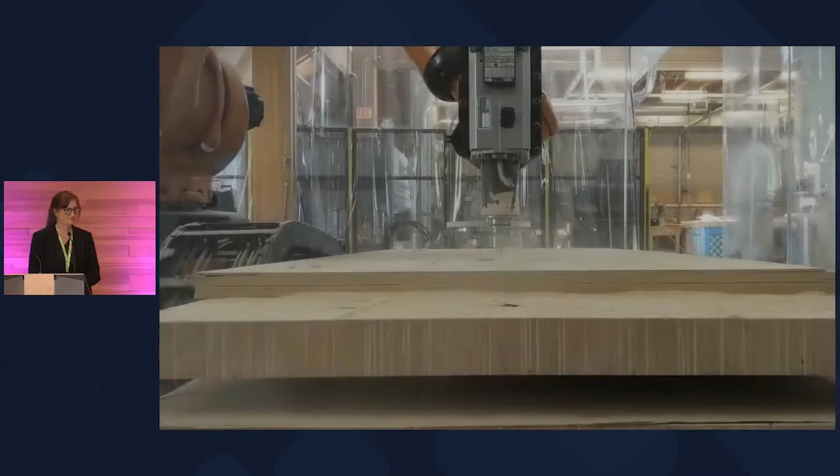And I'm going to show you a little bit of a video that some of you might find parts of familiar, if you look at where the things are sourced or who's talking, just to give you an overview of why it's important.

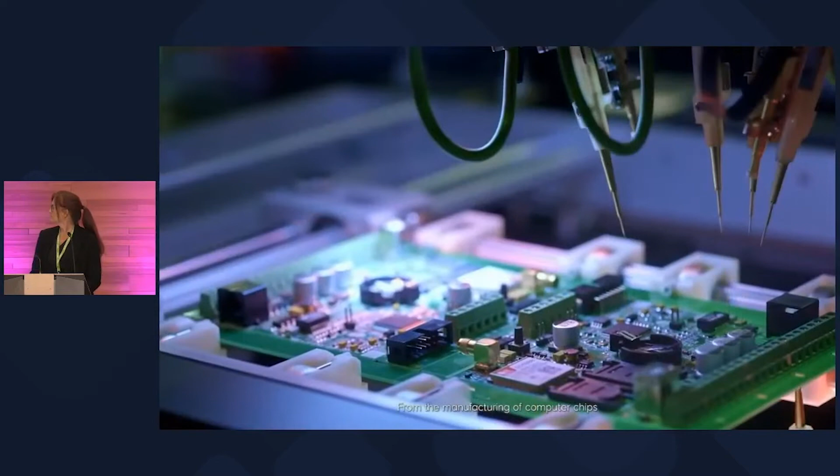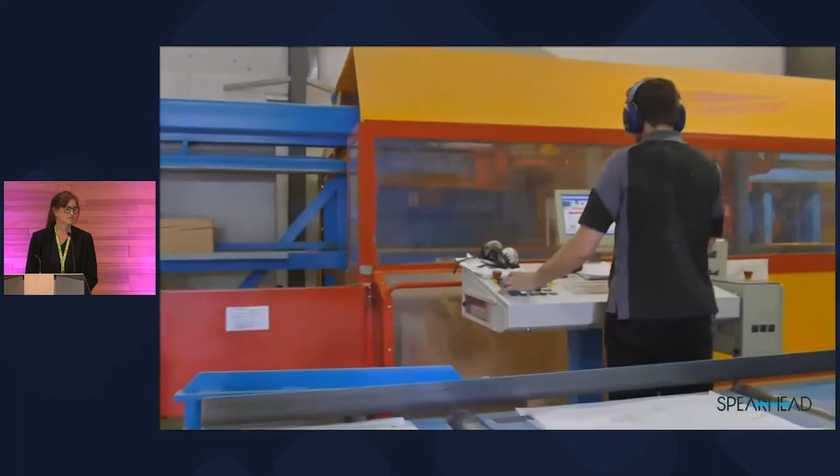From the manufacturing of computer chips to the way we make cars, robots aren't the whole story. How data is created, collected, and interpreted has fundamentally changed the way we live. And now, those same changes are happening in construction.

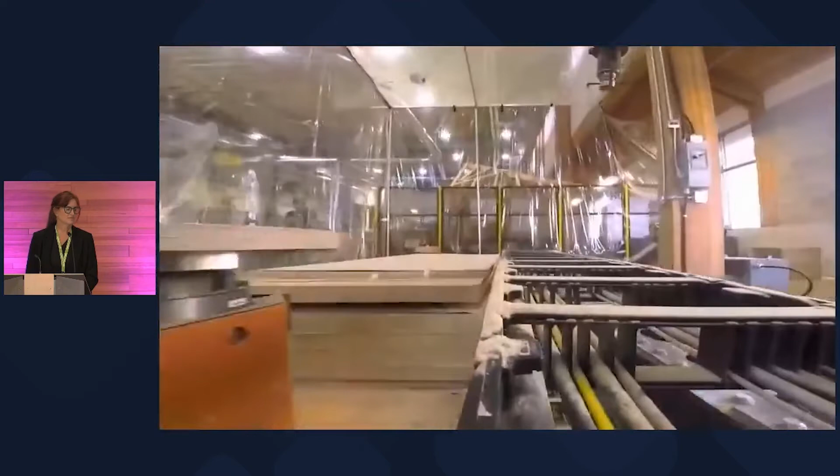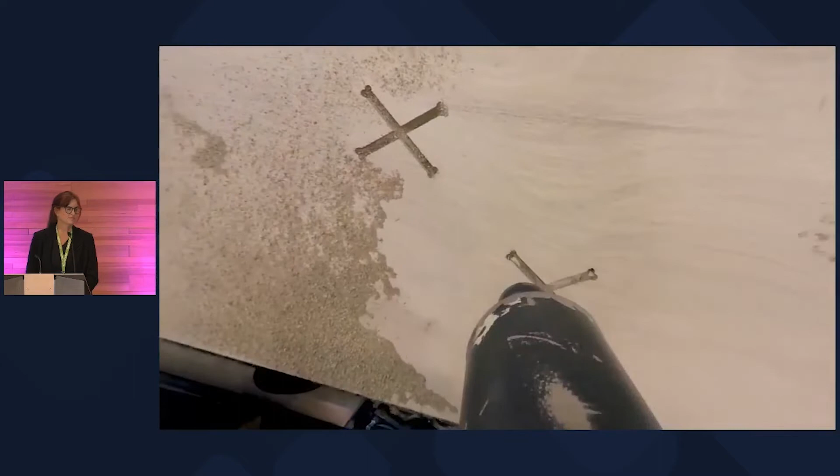As we want to build more precise buildings that function better, that work better, that meet energy codes, we've got to build at a precision level that's hard to do with a Skilsaw and a nail gun on a site when it's raining.

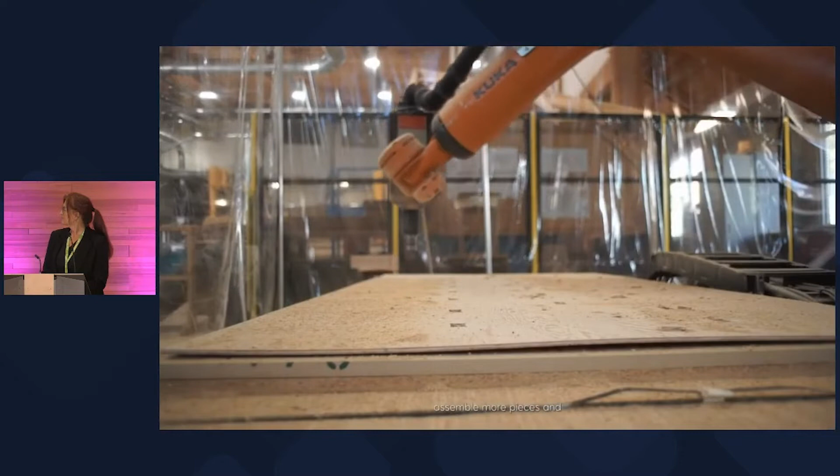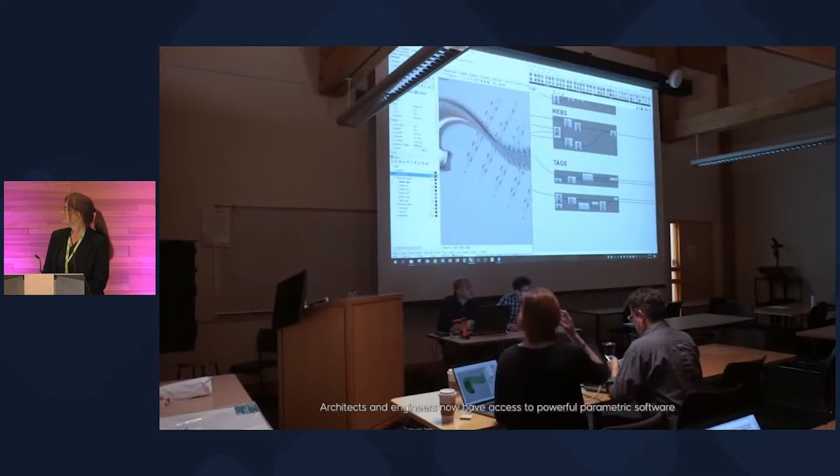Using robotics, it allows us to assemble more pieces and more complex pieces that in totality result in higher performing building components. Architects and engineers now have access to powerful parametric software that can create and analyze complex geometries.

When parametrics give you great control of the geometry, the next challenge is moving it into construction, because you need the accuracy in construction to be the same as the accuracy in the geometry that you have when you design.

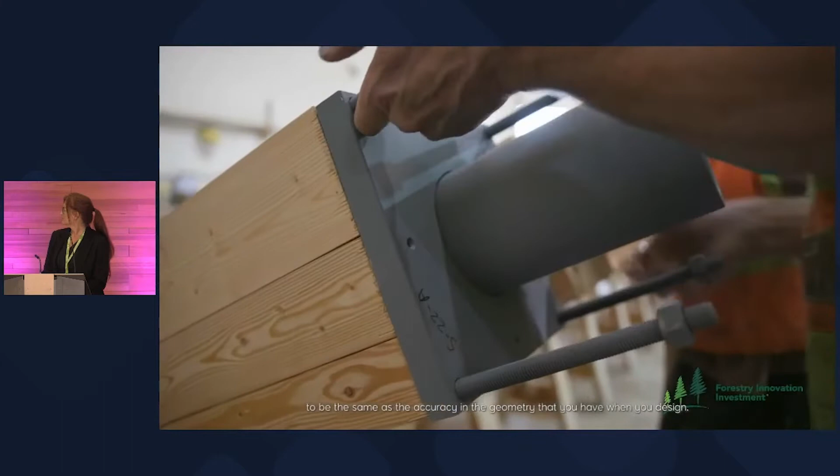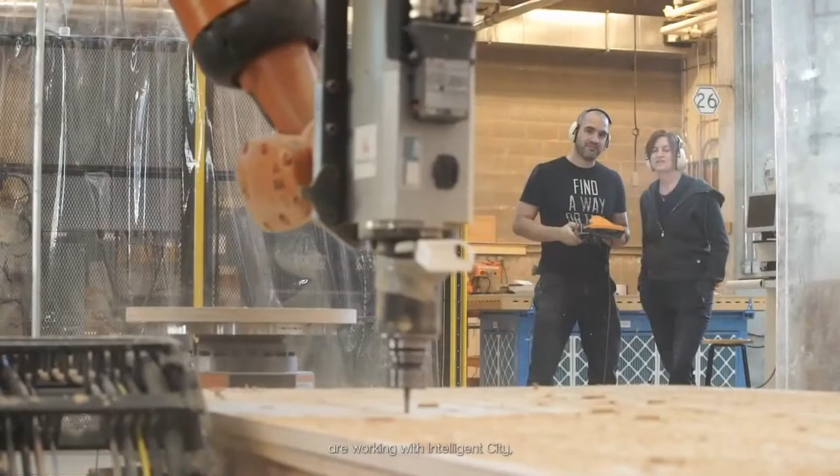At the Center for Advanced Wood Processing in Vancouver, researchers from the University of British Columbia and the University of Waterloo are working with Intelligent City, a local leader in mass timber construction, to make robotic fabrication more accessible.

There's a difference between what can be designed on paper or in software and what can actually be manufactured.

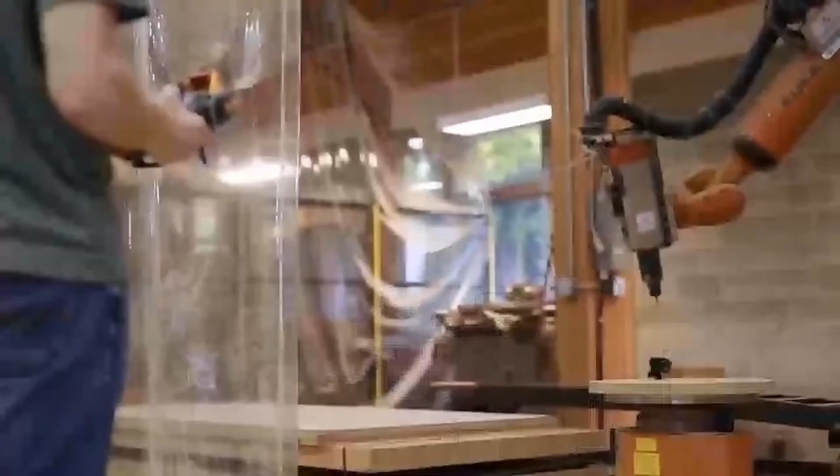We're looking at very free-form geometries, very curvy and expressive geometries, but it's very much the same as if we were to be designing a house.

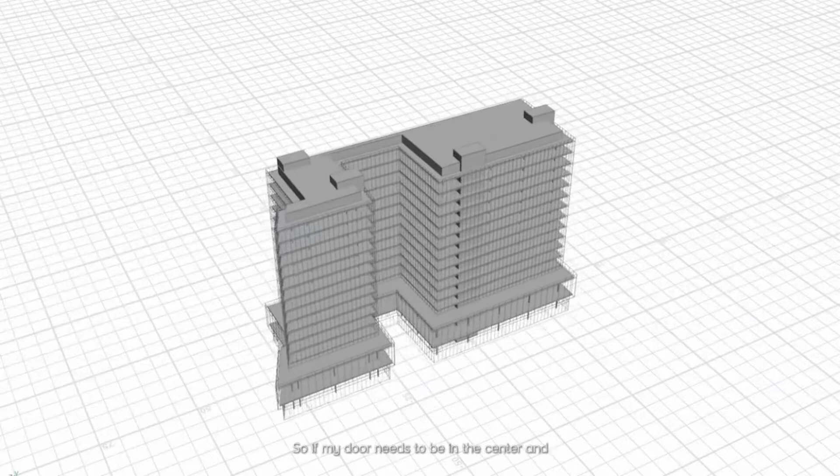Now, what's really cool about this computational process is that we can manipulate - if I change that house and it's now 8 by 10 meters, all of those elements are also correlated to that, so they will adjust. So if my door needs to be in the center and I change the length, that door will move and align itself with the center of that house.

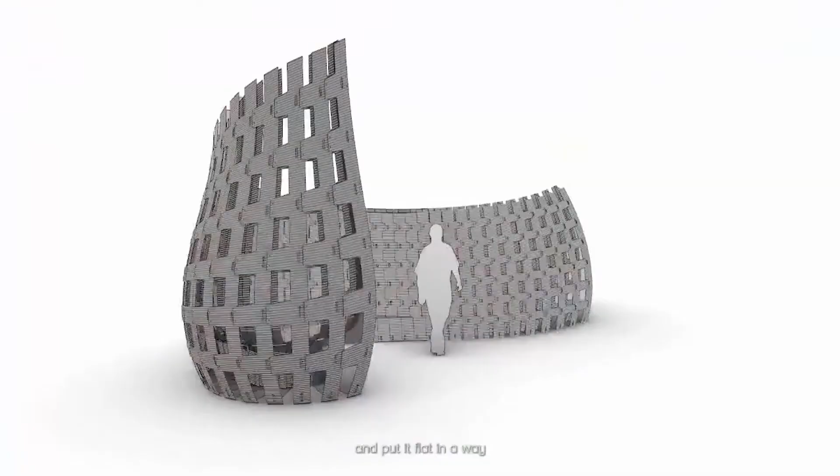Normally, this is something that we do in design, it's called associative design or parametric design. But here, we're also connecting that to the manufacturing. So we can take that wall digitally and put it flat in a way that then can be manufactured.

Robotic fabrication is not only meant to automate existing processes, but to augment what we can do, and further to introduce new processes that were not possible previously.

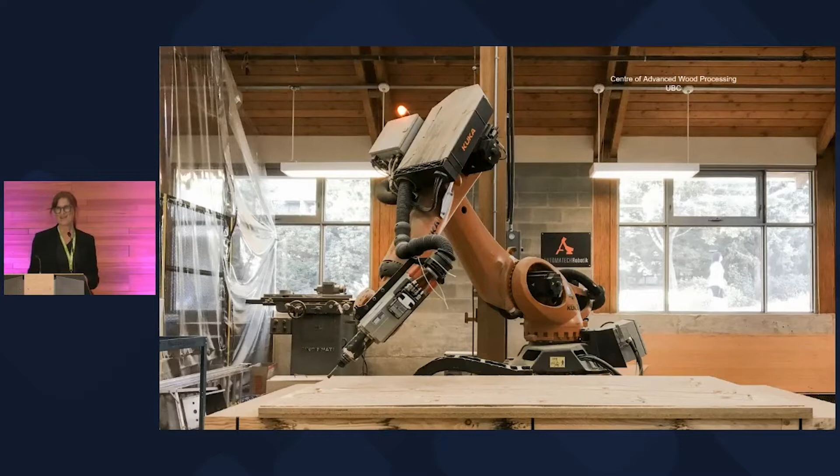So that summarizes in a really succinct way what we're trying to do and how we're working with some of you guys to do that.

I'm just going to show you a few examples of what happens in the processes and what we're doing. So this was our latest workshop here, which is basically looking at how do you get from the advanced parametric designs, that have very high accuracy, out into the fabrication process. So this is our latest one here.

So we're just doing a test project that really tests the limits of what the precision of the fabrication is, what it means to have the instructions for assembly within the elements themselves, and then what's the accuracy and the difficulties that you come to, on a very small scale when you come to the site.

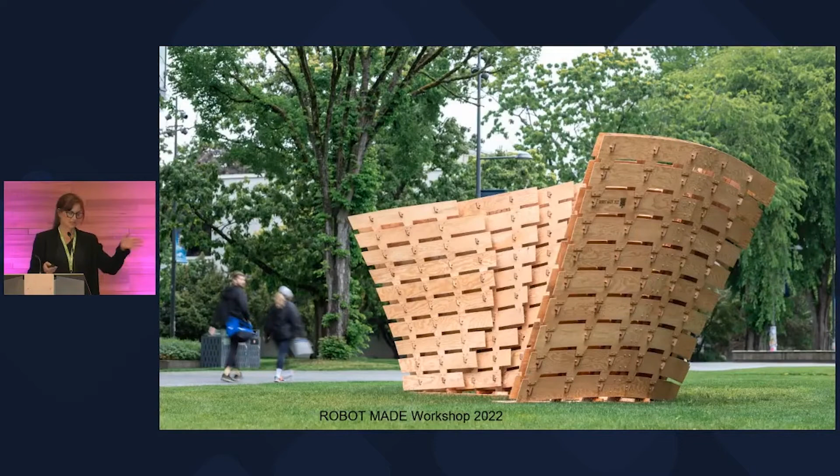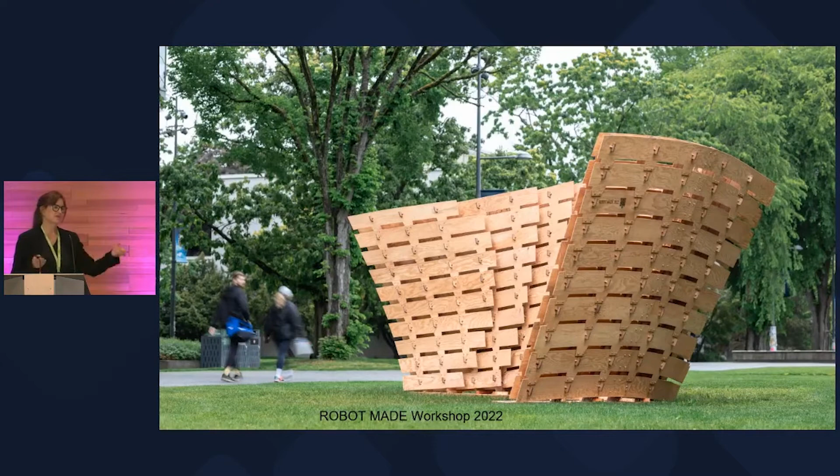So again, double curved wood. The reason for that is just because it's very difficult. There's a lot of gradients as well. We try to make things even more difficult by doing that.

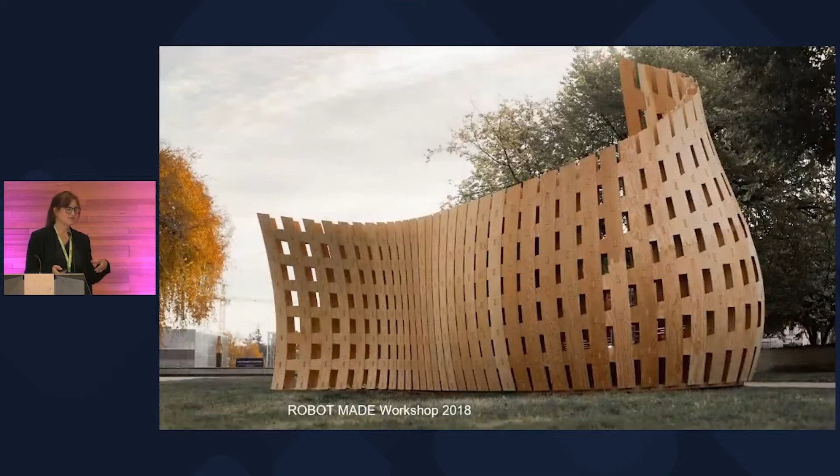This one has obviously many things that are being adjusted at that time. Even here we use a little bit of kerfing. You have wood-to-wood connections in most of them, so we're not using steel as much as possible.

And the things that the students are learning are understanding machining, robot code, G-code, tolerances, precision, instructions for assembly integrated into the design, structural forces and connections, and implications of parametric design and precision, which of course is a very tall order. The idea is that we do this, and then when they go out in the world they can then apply these in how they design in future.

This is a design build project that we did for a chamber music group. Again, this one actually had steel fabrication, and you can see we used our robotics, again with the Center of Advanced Wood Processing, to try and get that kind of double curved surface.

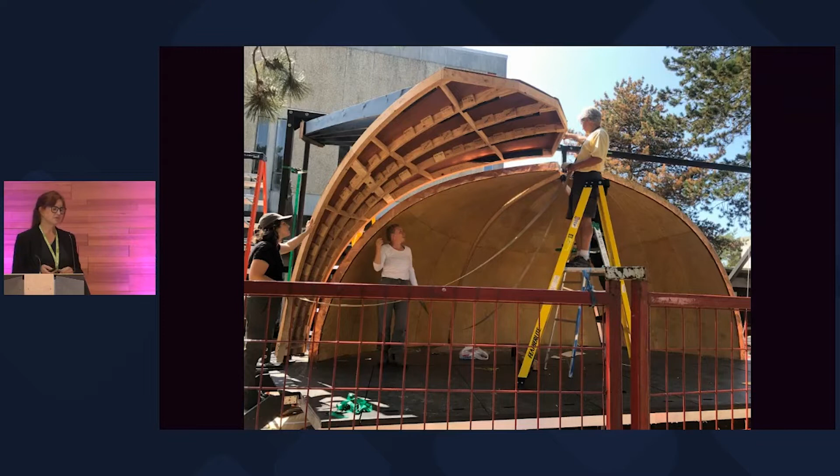In this case, it was for acoustics, so there's a lot of acoustic parametric modeling that went on for this, which actually amazingly worked quite well in practice. Always, always a challenge. And then this is the back of it, which has a really nice mahogany finish on it.

This summer, I was teaching the students a performative wood seminar. Again, we used our robot, and they had to then design the things themselves, including very complicated finger joints, more wood-to-wood connections, and that type of thing.

So basically, that's what we're doing in the School of Architecture. Thank you.

It is me. So I'm a little lower tech. I don't have a fancy video for you guys. I'm just going to talk a little bit about what we do at Fast + Epp.

Fast + Epp is a structural engineering company that's been around since 1985, and we're really steeped in projects, delivering beautiful buildings, practical buildings, or really whatever the client wants. We do have a long history of doing mass timber. We were doing NLT stuff well over a decade ago, maybe a few decades ago at this point. And then as CLT has come on the market, as GLT has been made available, MPP, all of those things, we really have adopted those into our vernacular.

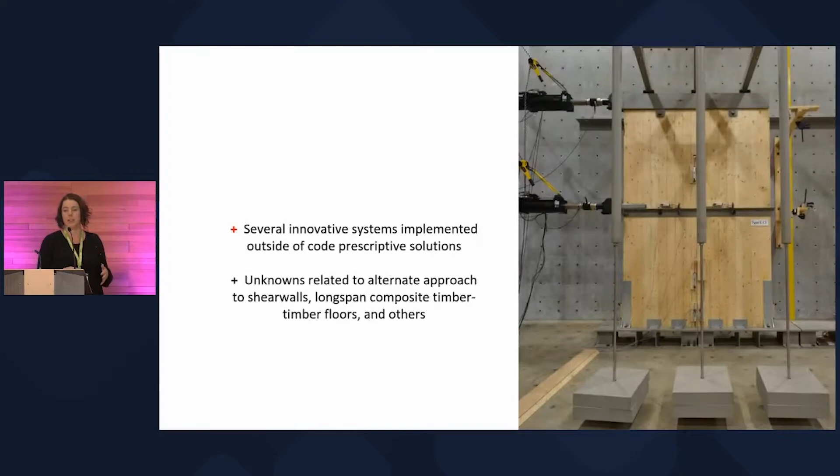I hope that it's a step towards that. But in this project, between the modeling, the testing, and the analysis that we did on our building specifically, we reached a point where we were able to implement this type of shear wall with a high level of assurance that we would get the performance that we needed from it.

Another example is Limberlost Place in Toronto. This is a university building for George Brown College—10 stories of mass timber. Because it's a university building, they wanted really open spaces for classrooms, atriums, all of that stuff. It was a competition-based building, so it won a big architectural competition.

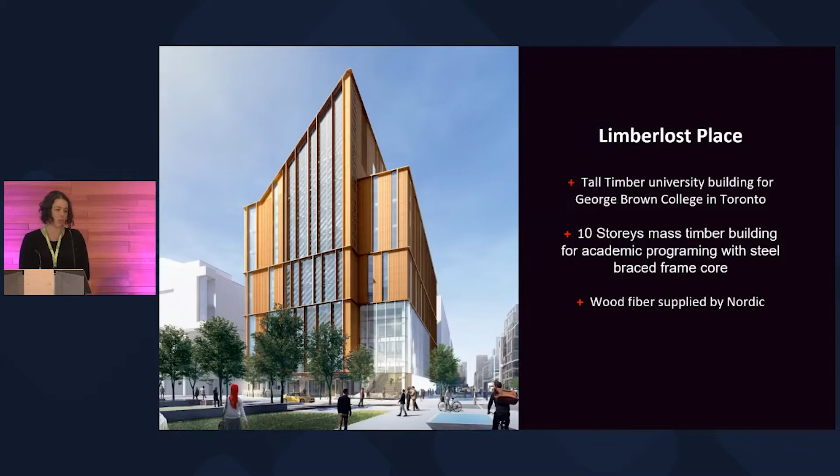The approach here was to use a sort of slab band system, but in CLT. So we had very thick composite concrete-and-timber slab band systems with thinner CLT panels spanning between them, creating—I believe it was 9 meters in one direction and 11 meters in the other—very big open spaces with no significant drop beams. Not quite a flat slab, but a very open system that wasn't going to have mechanical issues. You weren't worrying about how you were going to bend ducting around beams, or pass through beams, or anything like that.

So we wanted to create a system that would achieve that composite behavior between the concrete and the wood efficiently. The systems that have been implemented in the past tend to come at a high cost in material, whether that's screws or plates and glue, and are very labor intensive for installation. So we wanted to see if we could do better.

Similar to the last project, this project was also lucky enough to receive a pretty significant grant through the Green Construction through Wood program from NRCan. So we were able to partner with UNBC again and execute a really big testing program—I think it was upwards of maybe 500K—full-scale testing, small-scale testing.

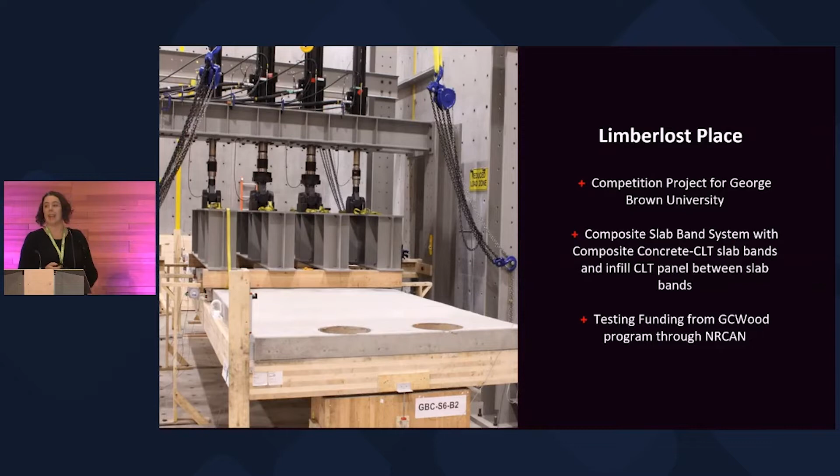And I think it saved the project at least $1 million. I'd have to look into the exact numbers, it might have been more than that. So this is another example where we needed to do this testing to get the project where we wanted it to go, and it really allowed us to push things further to get that really open floor span.

Another example is the BCIT student residences, and this is sort of the next generation. Many of you have probably heard of UBC Tall Wood, the first 18-story mass timber building in the world at the time. That building uses panels supported on columns with no drop beams. So that's the opposite approach, with much tighter spaced columns but no drop beams, avoiding mechanical issues, and it's also very cost efficient.

This is a new building we're designing right now, which is pushing that further. It's using bigger panels that are now on the market, and smaller columns in the form of steel columns so those columns can get buried in architectural partition walls. We wanted to take the research we did in partnership with FPInnovations to the next level. So right now we're undertaking a large testing program to better define the behavior of these two-way panels when you engage them in two-way action, avoiding those beams and all the complexities they bring from mechanical, electrical, and floor depth considerations.

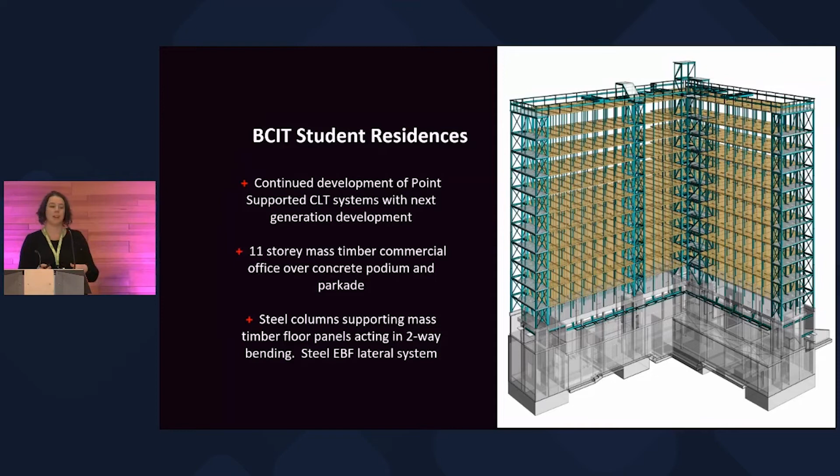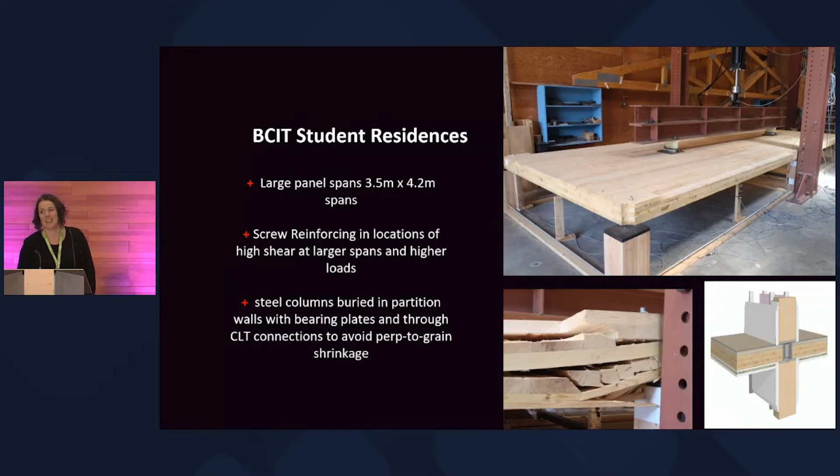So these are images from the testing that was done as part of the UBC Tall Wood project. We're going to be doing a larger suite of testing to better understand the behavior of these panels overall. We'll be doing small-scale and large-scale tests with the hope of eventually informing the codes, so that people who want to do this type of design in the future won't have to go through these rigorous testing programs. That's just a small sampling of the work we've been doing on the R&D side to serve our own project needs.

And we really do keep, even as we venture more and more into the world of research and R&D, a strong focus on what our projects need today or tomorrow. We're in the industry, we're living it. So we're not necessarily always going to be the blue sky thinkers taking you to 2050. We're more looking to like 2025, if that makes sense.

Okay, let's see if it works.

So as Helen has said, we positioned ourselves as the in-between of university and industry. We see ourselves as a market enabler and market accelerator doing applied research specific for maintaining and expanding the market for the Canadian wood and forestry sectors. We have offices across the country, headquartered in Quebec, with a large presence in Vancouver. I'm from Vancouver.

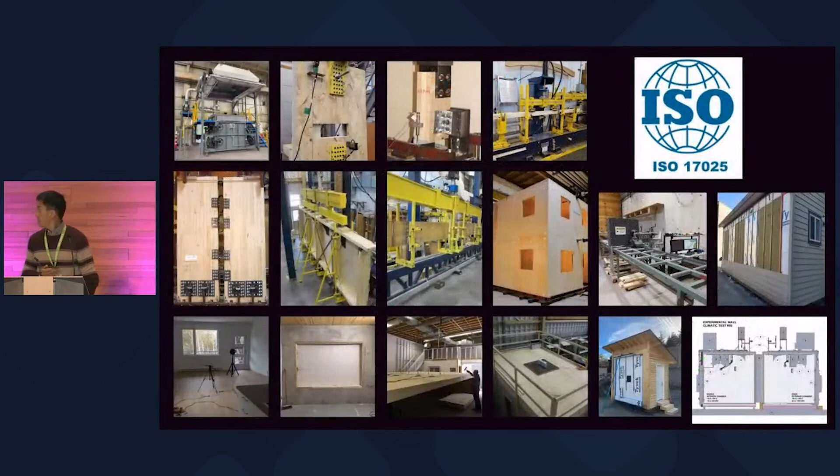Our laboratory, both here and in Quebec, is ISO accredited under 17025, for both routine tests and non-routine tests. What that means is we perform tests, and our data could help industry get their product into the marketplace at an earlier stage if you're an early adopter, to get through the authorities having jurisdiction. So that's a bit about the company.

A few years ago, actually 4 years ago, Helen worked with us, and then we started on the journey of industrialized construction. We see the industry is changing as robots work their way into the construction sector, as computers start to become part of the workflow. So we want to make sure wood remains the preferred construction material as the industry changes.

So we're currently in year 4 of the program, and we are looking at the entire value chain and what we need to do, what the wood industry has to do in order to be ready when it comes. We look at lumber, how our lumber is different from lumber in the European market, which is very advanced in terms of automation and robotization. So we look at what kind of technology and best practices can make our lumber more suitable for robots. We also look at engineered wood products, how we can bring the cost down, since they're already naturally straighter for the machine, but the cost is fluctuating.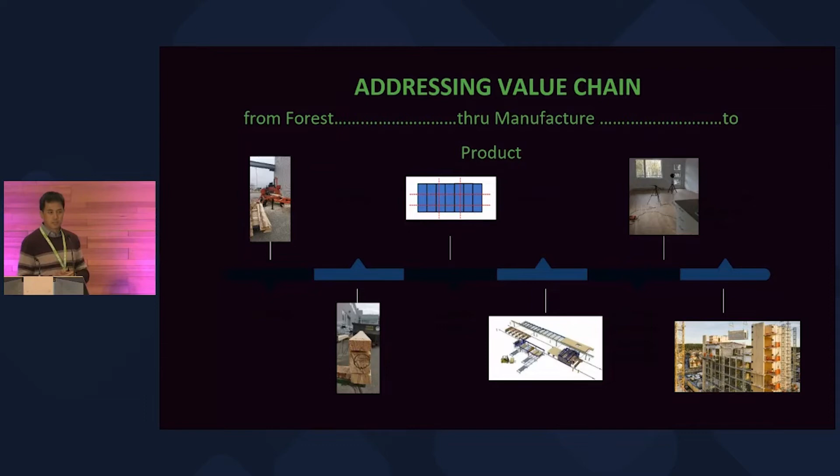Not only do we look at the design, construction, and product, we also look at post-occupancy—how the building performs, the mass timber building performs, using the latest sensor and IoT technology. We want to instrument those buildings, get data, and provide that feedback to the broader audience on how the building really performs.

This program I'm showing here is funded by FII. We have a program to get data for the latest buildings coming onto the marketplace, and then we analyze that data to see how the different component systems behave differently.

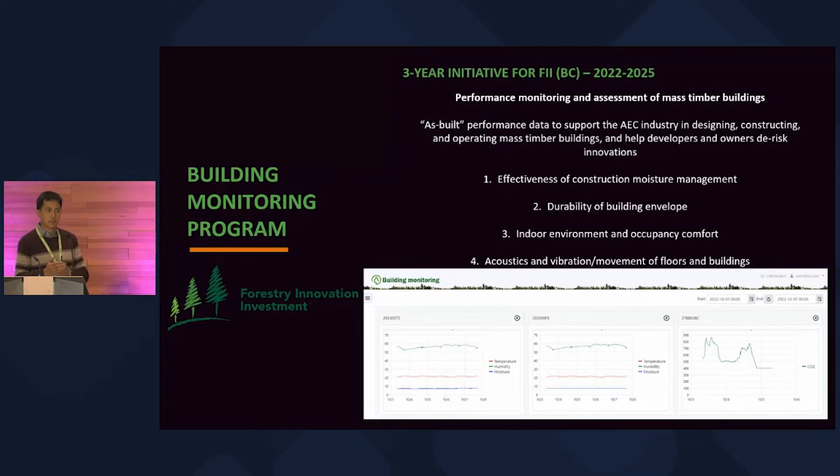It's a great guide, first of its kind—a collaboration of more than a dozen countries around the world with more than 100 collaborators. It has a lot of practical information that allows the industry to model and get the performance of the building in preparation for performance-based design.

So I encourage you to download this guide and ask questions.

As we're moving into this new era, we're asking: how can we develop the supply chain to be sustainable and able to do it offsite, in a controlled environment, while still providing the highest standard product?

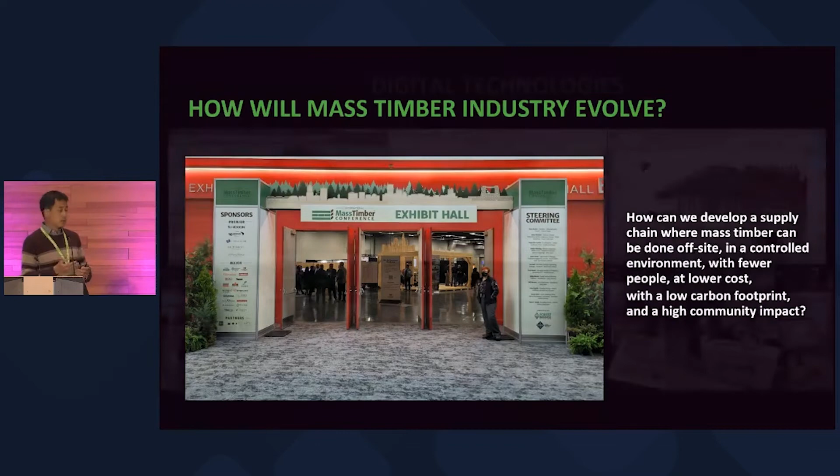It's really encouraging to see what industry is pushing and what universities are doing in adapting their curriculums. Last week I had the pleasure of going on a tour hosted by the Centre for Advanced Wood Processing—it was great education for me to see how the future is here and how the work we're all doing is making a difference.

The point is that technologies are here, and there are gaps. As an industry and as designers, knowing the capacity of software and hardware will really help make profit out of existing technologies. As software and hardware developers, if you're able to connect the dots and fill the gaps, then I think we can all move forward together.

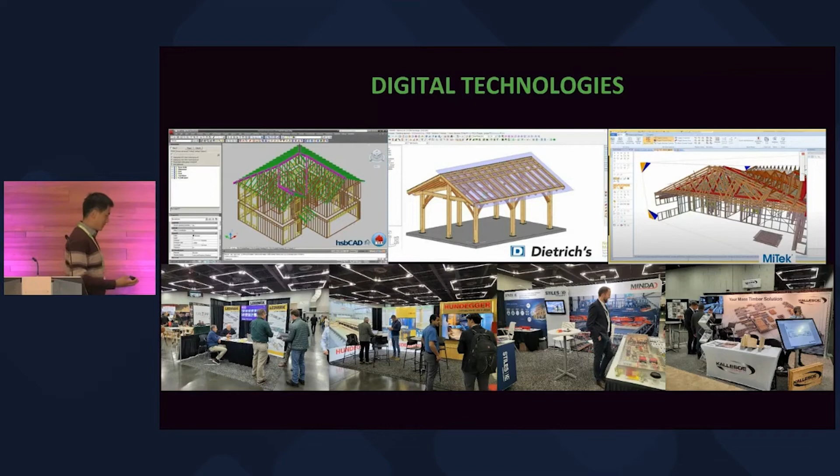Hello, is this working? No. Hello? All right, I'm going to go up here then. Dorian, is yours working too? Can you just make sure? Good. Thank you very much, you guys.

Super interesting, different perspectives from the R&D spectrum, from education through to research. What I'd say is it sounds like you guys have been very successfully busy—there must be things standing in your way. Construction isn't the industry you'd consider as being the most R&D forward.

Annalisa, where are the barriers? What's standing in your way? What would you need to do more of what you do, and where do you think the gaps are?

Well, I think the industry in general is very fragmented, and each consultant, each part of the industry, each fabricator, each contractor needs to take care of their own concerns. The problem is that it's a very litigious industry.

It's an industry where people are not working together, they're working to forward their own interests. That means they don't want to do any extra work that isn't required in their contract because everything is done low bid. Nothing is integrated, and nobody has any interest in integrating anything because it doesn't do them any good, and they're being pressured at the same time. This lack of integration in the industry is highly problematic. So even if you have ideas you'd like to take forward, the whole thing is set up structurally so that it's not in anyone's interest to do that.